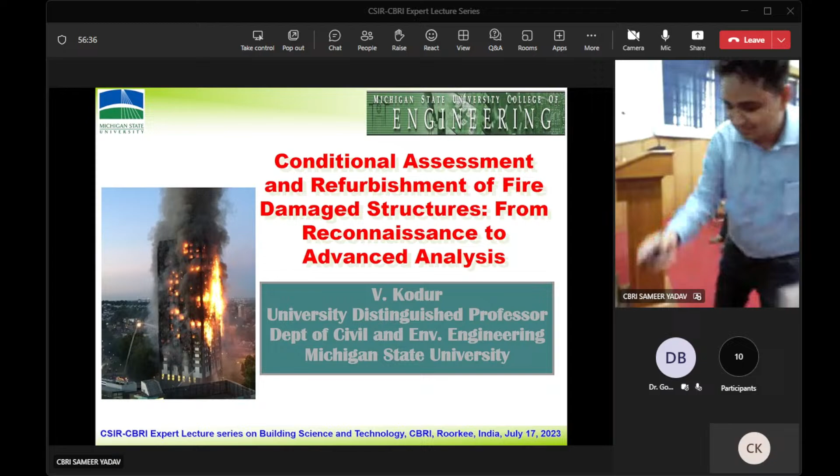Good afternoon to you all. So it's a great pleasure and honor for me to be back at CSIR-CBRI, after about 5-6 years. It's like coming back to the place where I had a few projects before. As you all know, I have delivered some seminars and presentations here. But I meet your directors, group leaders, colleagues, scientists in various forums. They were inviting me for the last almost 1.5 years, since after COVID subsided. So it is good that I have this opportunity.

I would like to thank the director here, as well as Pradeep Kumar, Dr. Arpal Singh, Dr. Benty, as well as many of the fellow group leaders and scientists for making this possible. I received a warm welcome wherever I go around the world, but never have I received a poetic welcome. So thank you very much for that, making it unique. Okay, can you all hear me?

Yes. Okay, so today's presentation is on conditional assessment and refurbishment of fire damaged structures, from reconnaissance to advanced analysis. I'm presenting this because, just like fire resistance design is prescriptive and primitive, post-fire damage assessment is much more primitive.

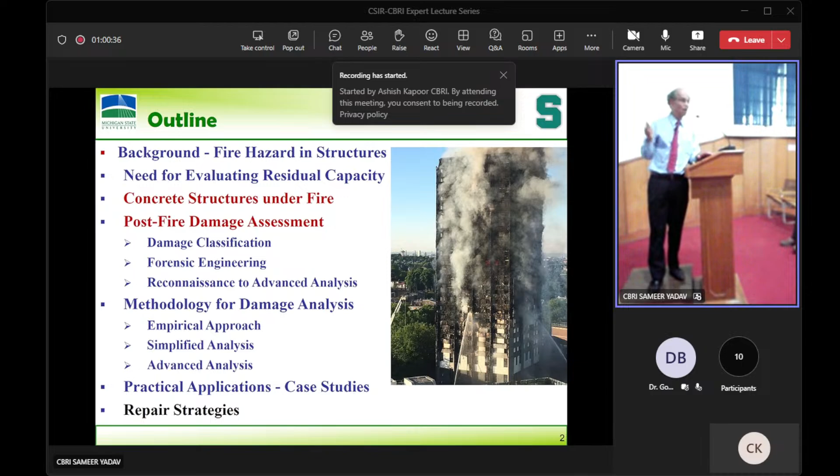And because of time, I don't have time to go into case studies, but recently we did one in Brazil. I'll just mention it, and there is a paper you can look at.

Fire represents a severe hazard and threat to the built environment. It causes thousands of deaths and billions of dollars of damage each and every year in all countries around the world. You see the statistics for the United States for 2021 published by NFPA, for example, 1.35 million fires, leading to about 3,800 deaths and $16 billion of damage.

This is the direct damage. Indirect damage, if you consider some repairs, retrofitting after that, it comes to $50 billion. So many of these fires result in a number of injuries as well as property damage.

Now, when it happens, it is the most severe condition a structure can face. Earthquakes are severe, losses are severe, impacts are severe. Fire can represent much more severe and lead to collapse in rare cases.

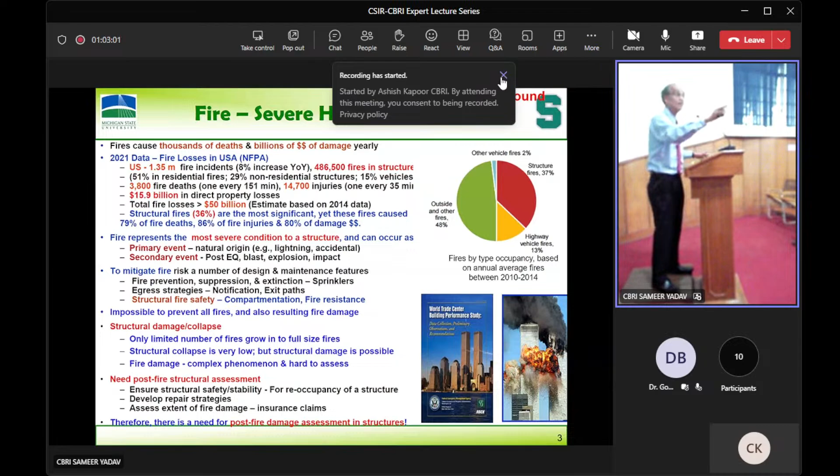Earthquake - New Zealand earthquake, Kobe earthquake, US also, San Francisco earthquake - fire does much more damage in some cases than the earthquake primary. 9/11, when it happened and the buildings came down, we did a 1 year investigation. Our conclusion is the towers would have been standing today if there were no major fire. The impact is not the one which brought down the towers. It is the fires which brought down not only the towers, but surrounding building sites.

So remember now Roorkee is flooded everywhere, including in the campus. In New Jersey, there was a hurricane followed by huge rains. In 2012, it's called Hurricane Sandy, one of the worst hurricanes we had. Huge flooding happened outside New Jersey next to the Atlantic Ocean, basements flooded, and the pumps couldn't handle it. Then what happened? There was one electric short circuit, in 1 hour it spread to 2,000 houses, burned away in 1.5 hours. 2,000 houses, each worth $2 million. These are beachfront homes - so imagine the damage.

So even after flooding, people laugh when I say this, right? Fire and short circuit - anything can happen, and it can spread widely and quickly.

Now, we have a number of measures we put in because we cannot prevent fires. So building codes do address this. They put in active systems such as sprinklers, leak detectors, smoke detectors, exit paths, followed by structural fire safety. You have to protect your structure. If you compartmentalize well, if the fire stays local, it's easy to fight the fire - it's a piece of cake.

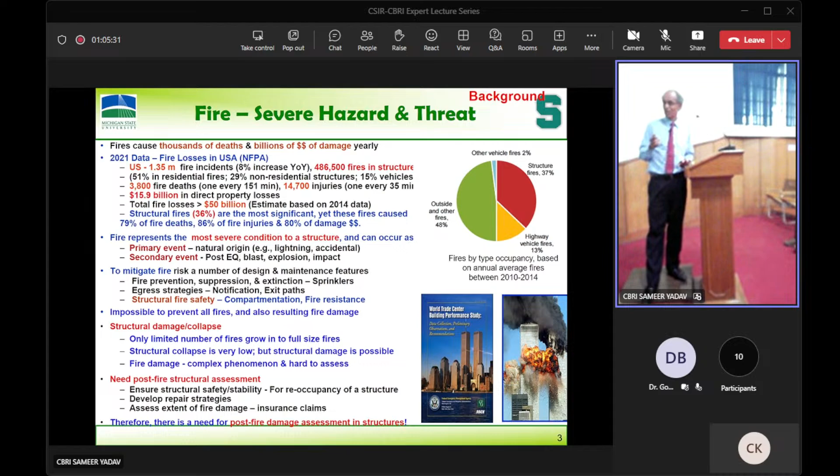Now, it's not just the US alone - look at the statistics here. India has the worst record right now from the fire safety point of view, which is very unfortunate. This is the statistics published by the Geneva Institute of Statistics, and according to that, between 2015 to 2019 - there were 23,000 plus deaths in India every year on average. China is next with 10,000, and then other countries.

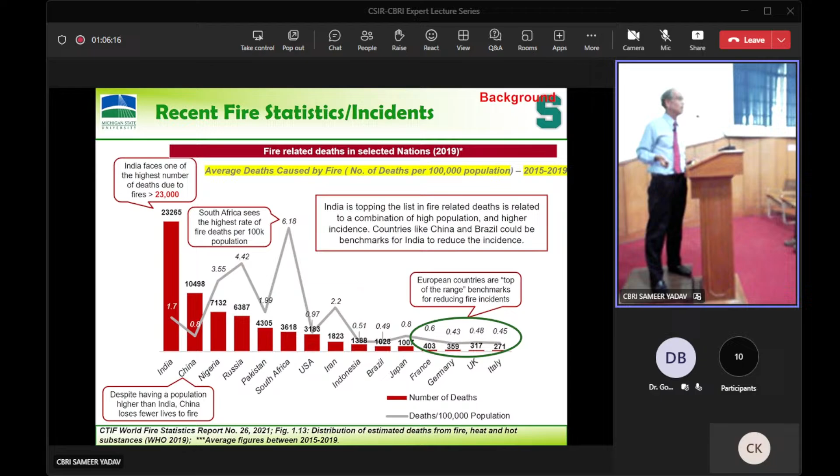People say fires are rare. Not true, a number of fires do happen, and these are some of the major fires in New York City. Fires affect weaker sections of society much more than rich, well-built people, especially women, pregnant women, aged people, and children. So from a national policy point of view, this is very important for organizations like CBRI, to protect the weaker sections of society.

4 days before that, the same thing happened in Philadelphia. The fires grew up there. And you know what happened on 9/11.

I was part of the investigation for a Technical University of Architecture building in Delft, Netherlands, in 2008, when this 13-story building caught fire. A coffee kettle, somebody didn't turn off, a student graduated and went home. There was a sink, the pot heats up, it quickly spreads, an explosion happens, and because of the short circuit, the water main is broken.

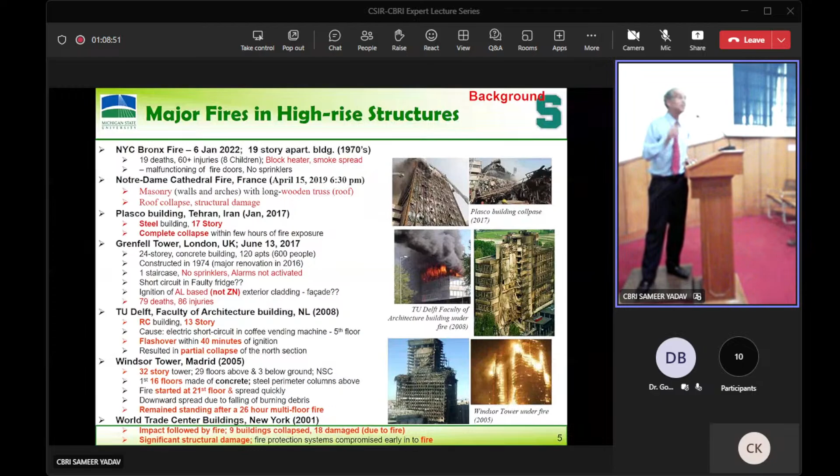But if you look at this building, it will tell you the importance of much more focus on residual capacity assessment and forensic engineering. This building, you might have all read about, it's in London, a 24-story concrete building called Grenfell Tower. Very nicely built building, modern part of the building, apartment building.

Again here, there were a lot of poor people, meaning a lot of refugees coming from Syria. So they didn't know the English language when they came in, though it was in London. What happened is one day a faulty electric wire in a fridge, a small fridge, catches fire, and suddenly fires spread rapidly. This is very rare, fires do spread but slowly, but because of the facades, what they put in the cladding, exterior cladding.

These days we are putting too much of this in our buildings for energy savings, for sustainability, environment. A lot of them are highly combustible. They are not tested. There is no regulation for putting outside cladding and stuff in many of the codes and standards. Fire spreads, and they couldn't get out.

So they were asked to stay in place, unfortunately. They were told not to come down because the fire department would fight the fire. The fire department thought they could fight the fire, but when they couldn't, people jumped to safety. By the end, 79 people died and hundreds were injured.

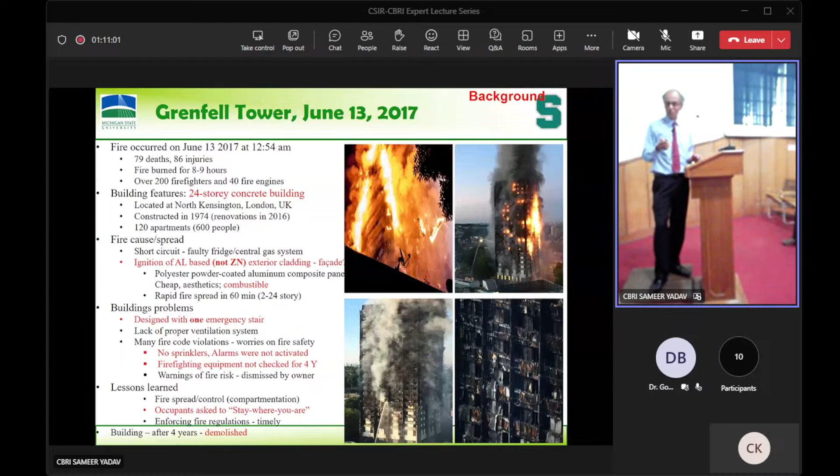Now it's not just buildings. Bridges are becoming a problem these days. Just 2 weeks ago, I sent an article to Dr.

It can circulate to you. This is very important for India, as I see it, for your metro stations or subway systems, which is coming all around the country as well as in the north tunnels.

So this is a steel girder bridge, and this is the I-95 bridge in the United States, the I-95 highway going from Florida to almost New Jersey and beyond, like Boston, basically Massachusetts.

So this big high tanker was going, and it tries to enter the highway exit, and it spills and hits the bridge. A huge fire starts, and the fire department comes in because it's outside of Philadelphia. They couldn't fight the fire, so the spans of the bridge collapse. Much damage. Not only that, the highway was closed for the next 3 weeks until temporary measures on both sides, bringing the supply chain, everything, travel, everything to a standstill.

So a number of bridges, even in Europe, and you see in China recently there were bridges. So rapid assessment is very much needed in these cases, either to evaluate safety, or what retrofit strategies to be adopted, and right now we don't have this.

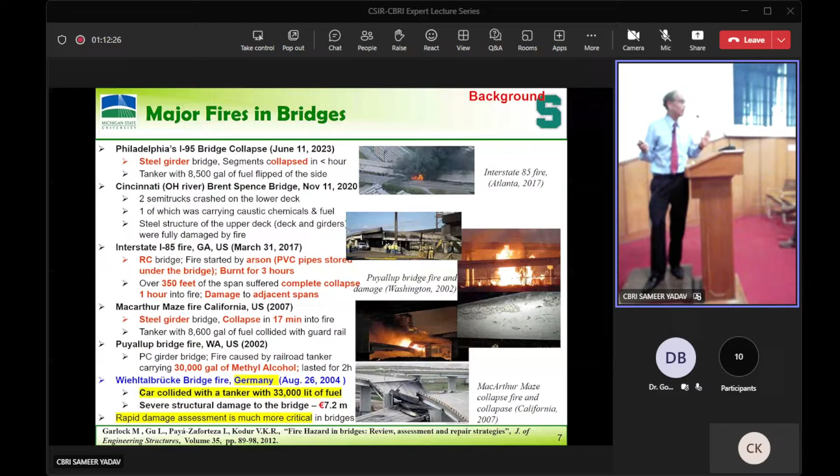So this is another interesting story. This is the I-85 bridge, Interstate 85, a major bridge outside of Atlanta, Georgia. On March 30th, 2017, the bridge was in a very good condition. We inspect bridges every 5 years and give recommendations on rating, just an ABCD rating. We rate them, A is good, D is bad. So this was in a very good rating just 2 years before that.

And after that, what happened? There was some drainage issue, water logging inside. So they brought in a lot of PVC pipes and assembled them for repair. They brought them in the first week of March. That's what happens in the US — all the repairs and highway work start after May when spring season begins, because it's too cold to work outside.

So in March, it was a very cold evening in Georgia, Atlanta. Some homeless person comes with beer bottles, wants to warm himself up. He puts some rubber, takes paper and everything, and starts a bonfire to warm himself. It was cold underneath the bridge where the pipes were. He was drinking, and suddenly he might have lost consciousness. Quickly it spreads to the PVC pipes — you know how dangerous that is, huge pipes. He runs away.

So somebody who sees the smoke while driving calls the fire department. They come in and start to fight the fire. Can you see the smoke in there? It's real, right? Within 1 hour, spans of the bridge collapse.

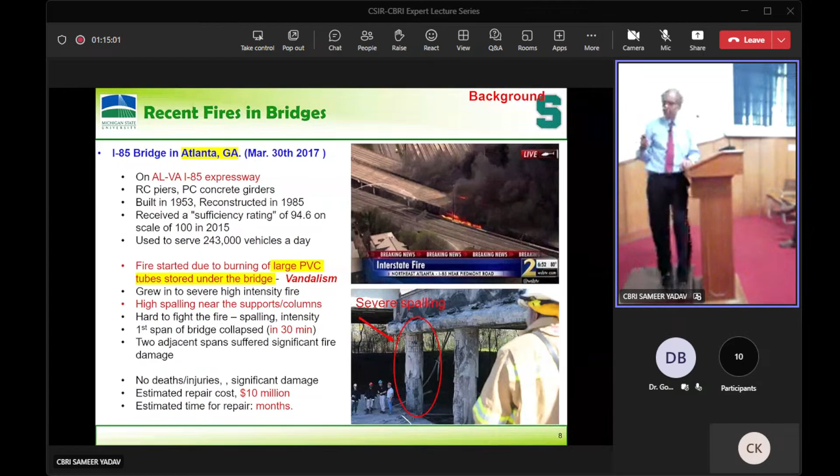And when it comes to India, you know more than that. I follow Indian newspapers whenever I get a chance, or news channels. Hospital fires are becoming much more common in India, which is very, very unfortunate. It's hard to evacuate people, and not only evacuation, but after that, what do you do with the patients? Where do you place those patients?

From that perspective, I was in Dhanbad recently, and I heard there was a fire in a hospital, attached to the hospital building. Both specialist husband and wife doctors died. Their relatives — two of them — died, and their servant died too. A short circuit started the fire. This was this year itself.

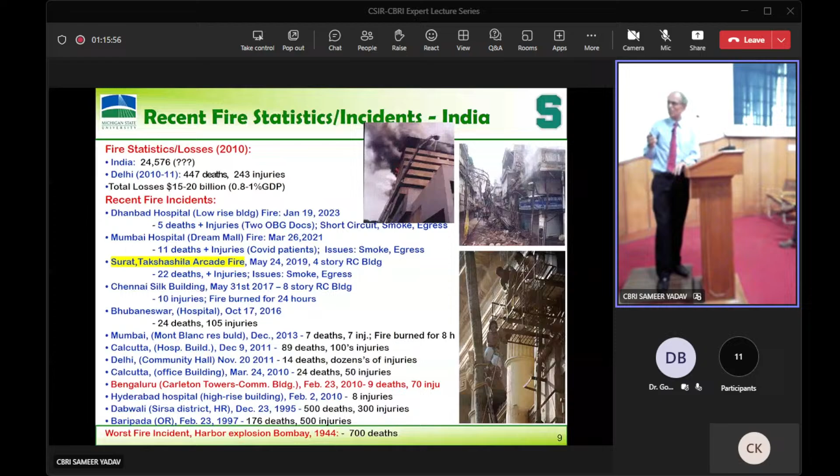So there is a significant number of fires in India. When it comes to an example of how important fires are in India, you can look no further than the Surat Takshashila Arcade building, a coaching center for people taking JEE and other exams. This building is just a 4-story building — and look at what happened.

Electric short circuit, number of students were there in the coaching center. The fires these days, because of the type of materials we have, combustibles we have, because of layers of curtains you use in the home, because so many shoes we keep, our fuel load used to be very less, right?

All this leads to sudden burst of fires. Very quickly they spread. We did tests with Underwriters Laboratories for US fire departments to see how far modern buildings, structural members collapse in 6 minutes, whereas previously the same structure, same contents used to take 30 minutes to experience the collapse. So that's what modern materials, concrete, steel, wood, FRP - the more modern the material, the poorer the fire resistance.

So anyways, in this building, many of them were teenagers, as you can imagine, 24 deaths, right? And they couldn't use the staircase at this stage. The emergency gate - the staircase itself was adding fuel to the fire. This is the scenario with fire safety, right?

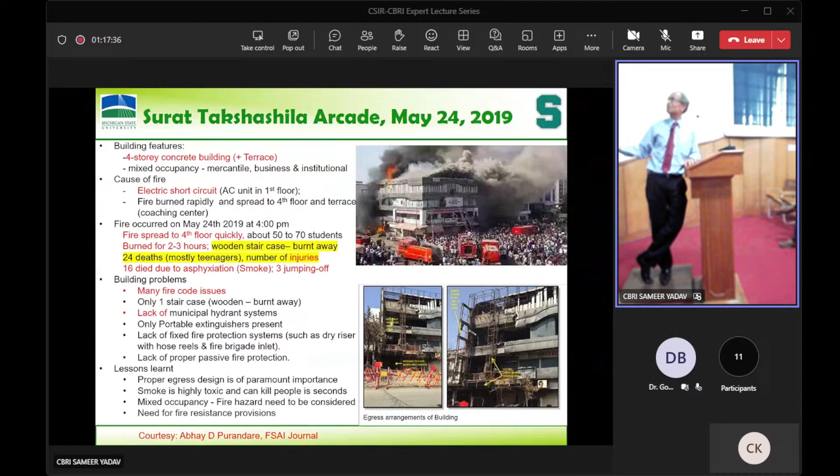So after that, the structure itself was okay, but still it has to be evaluated, so residual capacity is very important. So what do we do currently?

We put in lot of measures in building codes. Not that we don't do anything - active systems such as sprinklers, heat detectors, smoke detectors, exit bars. Some of them work, some of them don't. But the second thing we put in is fire resistance, which is basically a structural member has to stop the fire there itself, which is compartmentation.

The walls and floor systems are flat. Our columns and beams, they should have stability through for 2 hours, 1 hour, 3 hours duration, depending on the height of the building, size of the compartment. So we put in this.

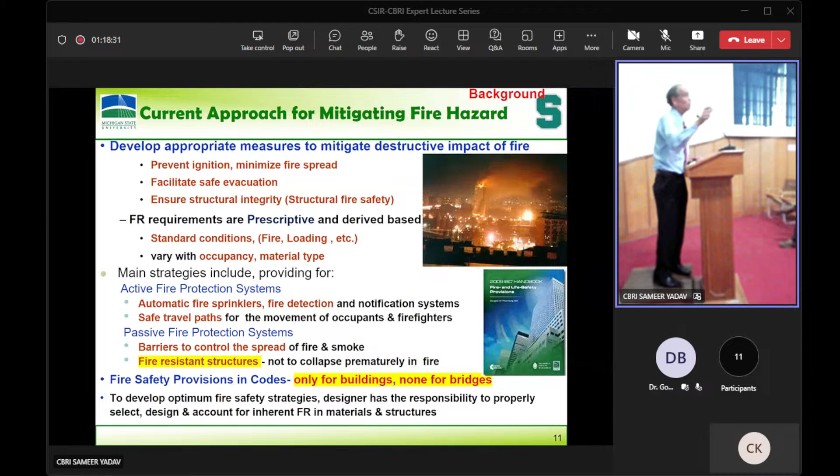But we don't have anything for bridges, very little for tunnels, tunnel linings, for example, and also there is no specific studies when it comes to metros and some of this as well. That's where currently it stands.

Now, if you see that, all these measures we put in, this is where your sprinklers see. This is how fire grows in a room, typical. Look here, slowly, it takes some time. It doesn't grow very fast.

But after that, once everything starts burning, this is called the ignition phase. This is called the growth phase. It grows, flashover happens - then whole room burning is flashover. Then you have fully developed fire, and then it dies down.

So where does structural fire safety come in? Here - nothing happens to the structure up to reaching the fully grown fire. Nothing happens to your structural elements. It's only sprinklers, heat detectors, smoke detectors - they are the ones which play a role.

Even when they don't play - if they put out the fire, that's good, right? So then, if they don't put it out, then you have growing into the phase of the structural. So at that time, structure has to withstand that fire.

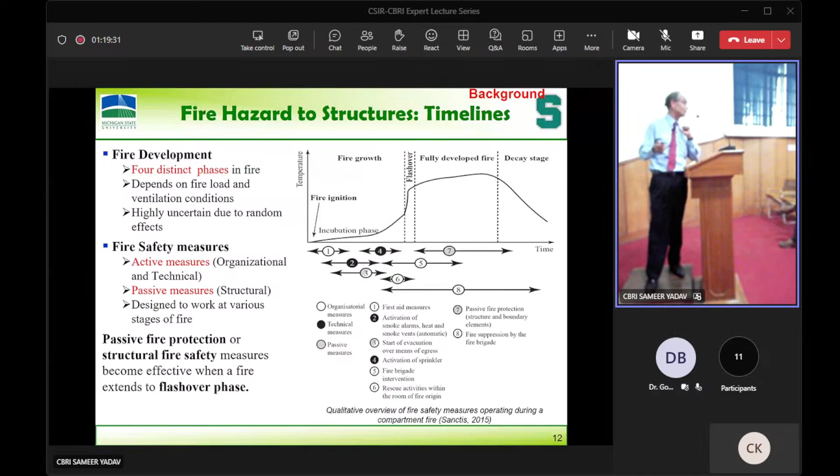Now, so in this case, what we can conclude is fire is a rare event. It doesn't happen in thousands of fires - it's still there. When it occurs, only a subset of fires grow into it. Otherwise, they are put out by the firefighters or sprinklers or automatically. A lot of fires die down themselves if there is not enough oxygen or fuel.

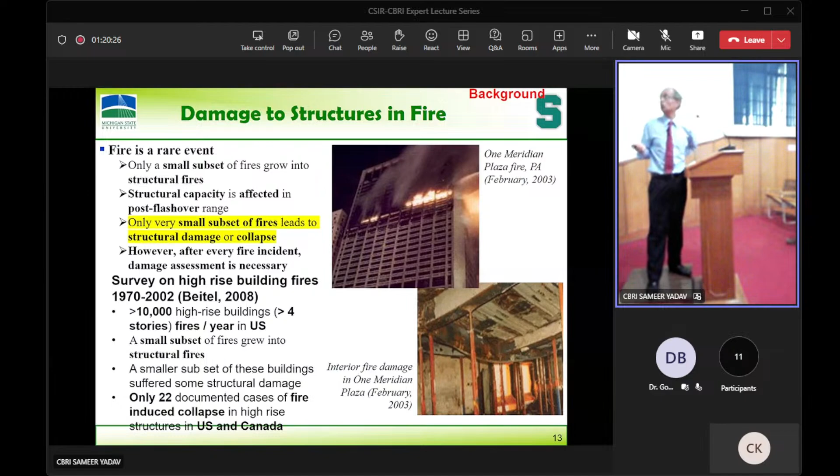But when they go into a small subset of fires, they will do damage to the structure, and a much smaller subset will lead into collapse of the building. But when they do the damage, whether to get back to that building, whether to open the bridge, how much strengthening has to happen, how much to put back the capacity to the original level - you need assessment first before even the record, how much insurance damage you need. Okay, so that's very important.

Now, fire damage is not as easy as we say by looking at it. With experience, you can do a little bit of that, but otherwise you need proper engineering because it depends on number of factors, such as how severe was the fire, how long it burned. Common sense - concrete can withstand better than steel or wood, right? So then structural detailing, how much load was there during the fire or before the fire, or how much reserve strength.

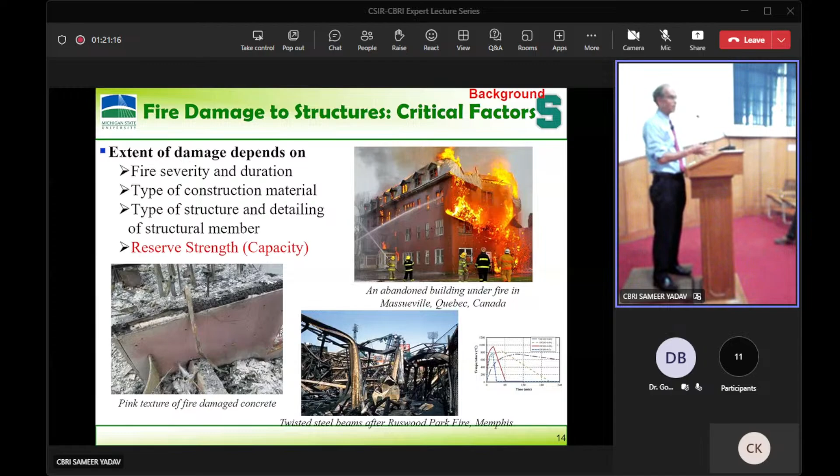A lot of times we over-design the structure, very commonly in most cases. You need to know the higher the over-design - these days it's reducing, that's why the structures behave well. More the reserve capacity, better it is from the fire safety point of view.

All this is important. Today I'm going to talk about, we have done the same thing for steel structures, but a lot more focus on bridges because steel bridges are much more vulnerable. We don't put fireproofing. I'm going to present most of the stuff today is for concrete structures.

From this point of view, concrete, you can expect very good performance during the fire and after the fire. So when the fire dies down, concrete structures do have a good level of reserve capacity to retrofit and strengthen.

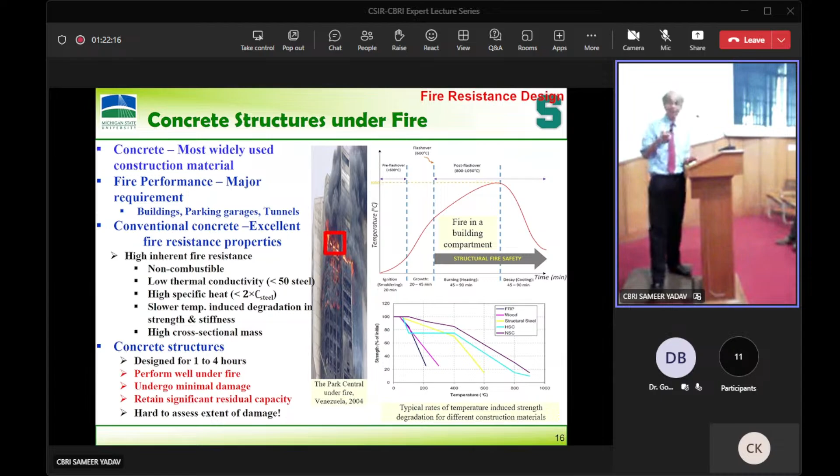So nobody wanted to fight the fire. There were bodies stuck underneath, so they were pulling out the bodies. When we were there, unbelievable body parts. They were focusing much more on that than on the fire, and also on opening the area for the stock market. But anyways, this building was on and off, nobody was inside, but even after 5 days, it didn't collapse.

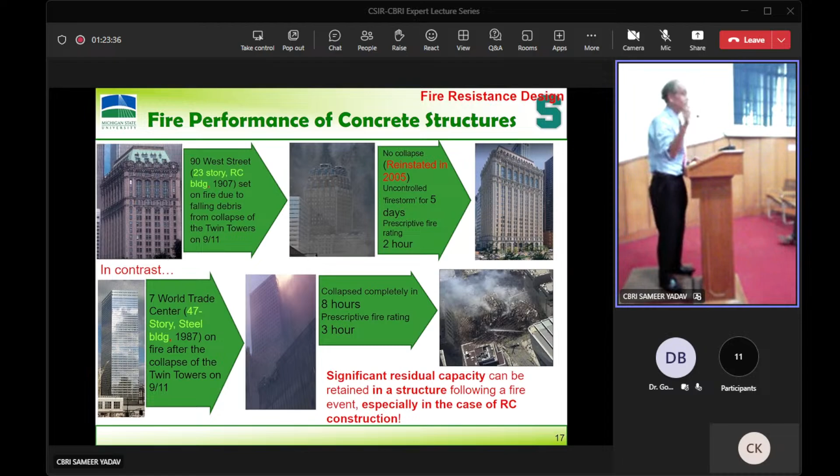Look at the steel frame building. This is the 7 World Trade Center, opposite to the two towers, a nice steel frame building. A fire spread into this building on and off, it burned for 8 hours and collapsed in 8 hours. Steel frame building. So this gives us a good idea that concrete buildings do have much higher fire resistance capacity.

Now quickly, this was a fire in Turkey just recently, in April I believe. In this building, 8 floors high, a rich condominium building, and you can see here, concrete buildings... I wanted to show you how it works, anyways it doesn't work. In this building, when the fire spread rapidly and quickly, for 8 hours firefighting was happening, many people were evacuated, nobody died luckily because quick evacuation happened.

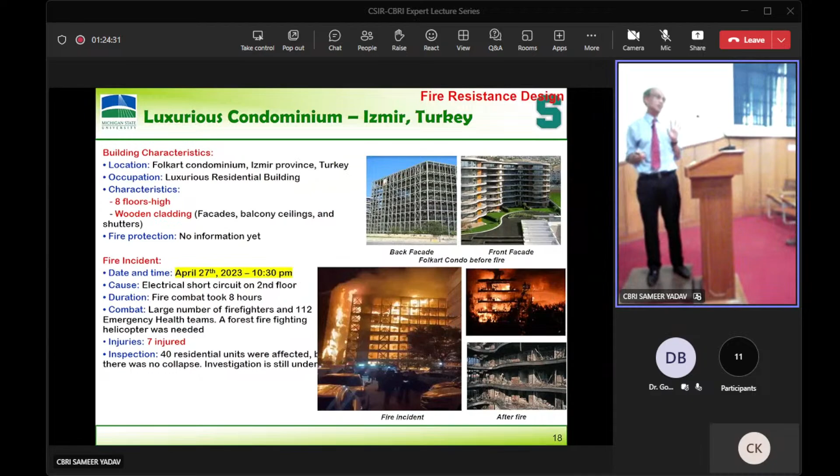But one important thing is it didn't collapse. Now they are retrofitting this building and bringing it back to occupancy. So this shows the importance of concrete structures having this resilience.

So I already mentioned quickly, why do we need to evaluate residual capacity? To assess the post-fire damage, whether it's safe to send people inside, to send equipment, to send first responders inside, even to look for bodies. So you need to ensure short-term and long-term stability is there.

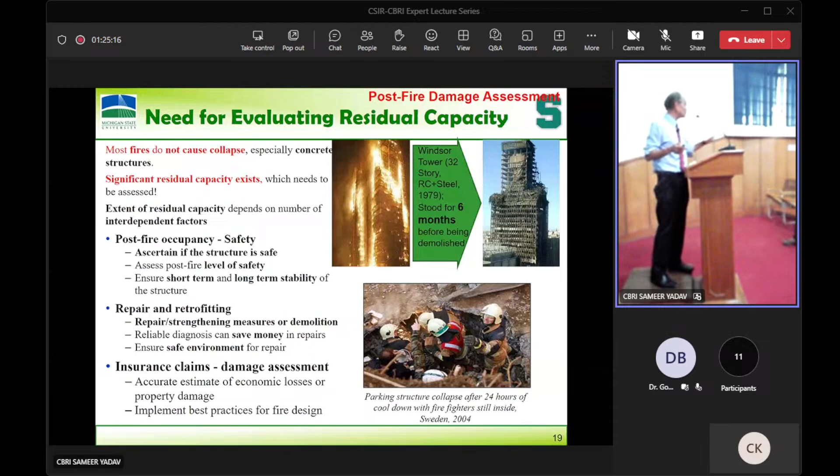Second thing is, if you want to repair, what level of repair is needed? You cannot just cover up cosmetic damage. You need to know how much rebar still has strength, how much concrete spalling has happened, whether to bring it back. And then insurance plans - a lot of times buildings are insured in most countries, so when you want to pay out, insurance has to estimate and approve that damage. So this is very important.

So what happened was they went inside and fought the fire, came back, and everything was fine, they went out. Next day they have to write the first investigation report. The firefighters are responsible, so they went in. After about nearly 24 hours, both structures collapsed. So it's the cooling phase, not a residual phase, I call it.

That's why in Madrid they didn't want to go. The residual phase is much more dangerous from that point of view. A lot of times firefighters aren't knowledgeable because we aren't teaching much of this in our courses. So the residual phase is more dangerous than even the heating phase sometimes. In the heating phase, they're covered, they're visiting, they're far away. In the residual phase, they're very close. The structure is cooling down, it puts too much stress on the connections, and it's recovering, with too much tension forces. It's not designed for that, so it comes down.

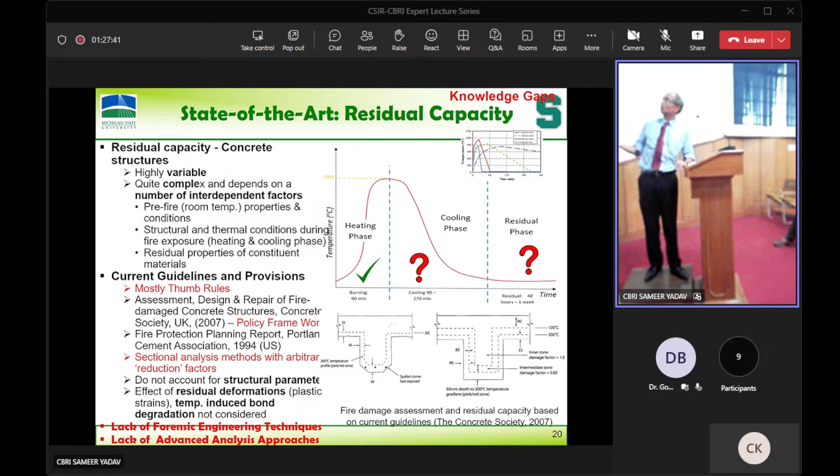So then there's a lack of engineering advanced analysis approaches. This is how it typically behaves. If you have a building here, let's say this is under fire, that's the beam. You want to see how much capacity it has. So this is the fire in the room itself, in that compartment. This is the temperature in the rebar inside the concrete - you know where the rebar is. And if you see here, this is the depth of the concrete beam.

Somewhere there. Now, the deformation - this is the first 15-20 minutes, nothing happens. Then slowly deformations increase. But since it's cooling, with a certain lag, it starts to regain its deflection, regain its strength. Then it goes up - this is the residual. So finally you end up with residual deformations, and that's the one - when you have residual deformations, the capacity is very complex to model.

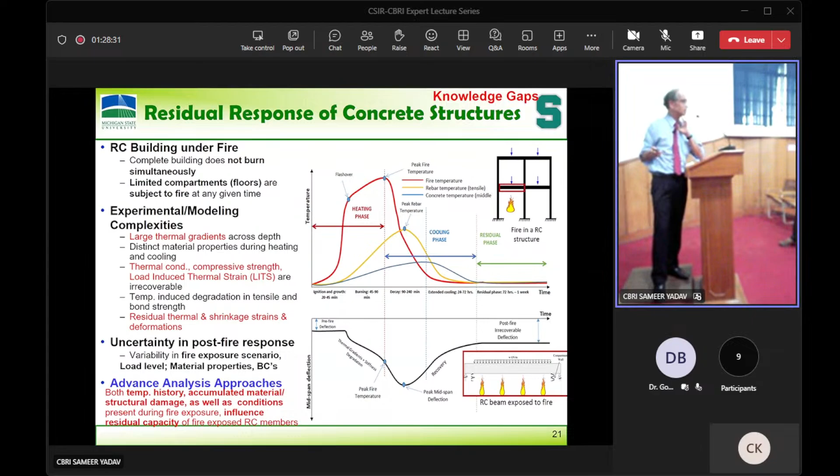It's not easy. So we have done a lot of work over the last decade or so, as I mentioned, on this subject with significant funding. So what did we do? First, we looked at the state of the art, as I already showed you, and identified the knowledge gaps. Then we came up with a classification system for damage assessment. Then we did a lot of experiments, and developed methodology at different levels, depending on different extents of damage, which have different classes of damage. And then we did some practical applications and repair strategies.

So first, let me quickly show you some experimental studies. Doing a residual capacity test is different from a fire resistance test - you cannot do it in one shot. You have to do 3 stages of analysis or experiment. Just before the fire started, you need to know how much capacity the structure has. This building was built in 1947. Today, we don't really know the capacity of the beam. Even at that time, if you look back at drawings, you cannot take it at face value - the real reserve capacity has to be established based on this.

Then you have to subject that beam to fire, involving heating - a realistic fire, not the standard fire - heating phase, cooling phase, whatever is present in the room. Then once you do that, after the cooling down, you subject that beam to a structural test to find out how much capacity remains. So 3 stages of analysis are required in doing this experimental procedure, which we developed in 2013 and 2014. So if you see here, this is the first stage.

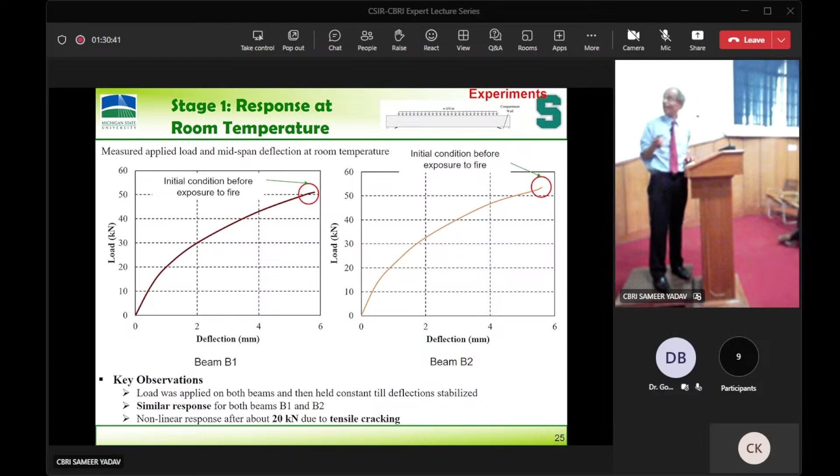First stage is this: you need to apply the load to those beams equivalent to whatever the service loads were, not the full design loads, not the ultimate capacity. You need to subject them to service load, find out how much deformation and deflection the beam has under service load. Then you carry out the fire resistance test on the beam by subjecting it to fire. Look at this - this is the fire load, just like it was in that room, depending on the fuel load. You can calculate the fire loads - I'll show you quickly. Then this is the temperature in the rebar, and this is the temperature in the concrete, measured at various places using thermocouple instrumentation. Then this is the deflection - look at this, this is one subjected beam. We tested these 2 beams.

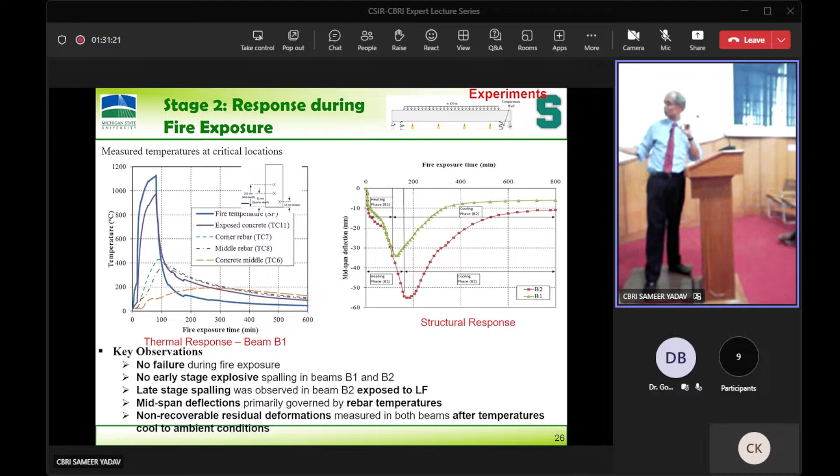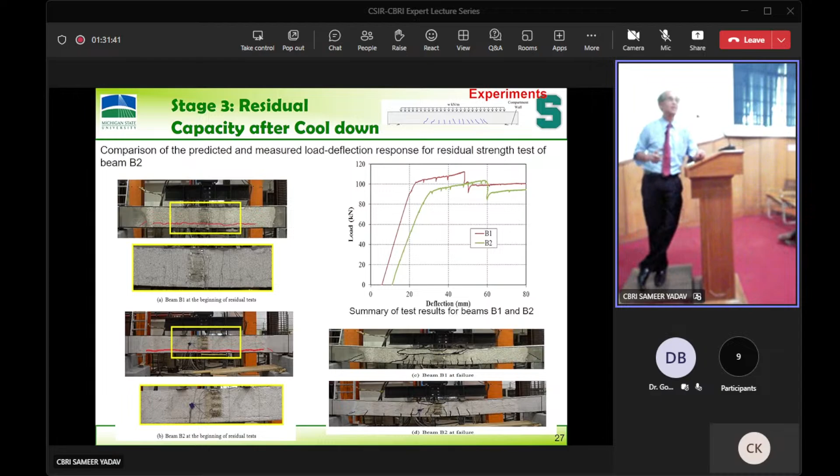One with a short arc fire and one with a long arc fire. So there were 2 fires which we looked at. As you see, this is short arc fire, this is long arc fire. We subjected that, then established the residual capacity. The one with long arc fire has lower capacity than the short arc fire, the low deflection one. Then you can estimate what the capacity is.

Following that, tests were useful for model validation and a number of things. Then we started the fire damage assessment procedure we developed. For inspection, everyone used to ask me before, give us some charts, what is what, how to inspect this. We said as soon as you go with some experience and background, with an engineering degree and expertise, you can assess on the second or third day at the job site. You can divide it into 5 classes of damage.

Class A, Class B, Class C, Class D, Class E. What is Class A? It's cosmetic damage - paint came out, chips of concrete, not too much to worry about from a structural point of view. Smoke damage, you know what I mean. Class B is minimal damage, you check some of it. In steel structures, you see the fireproofing coming down sometimes. In wood structures, small bit of charring. Depending on the material, you have different damage.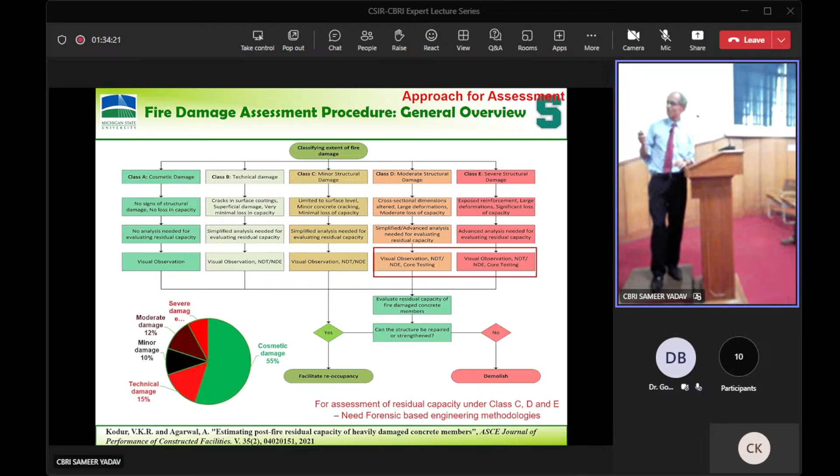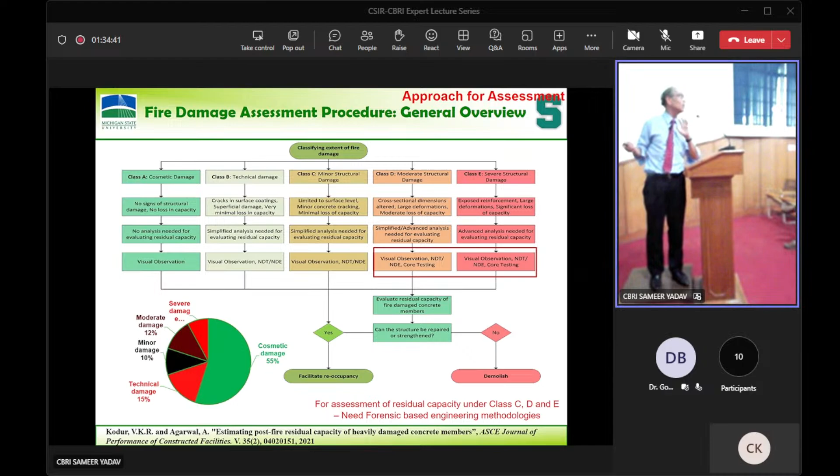This is why engineering assessment is required. We looked at a number of cases, as you know, of how many fall under minor damage based on previous fire incidents. Very few will fall under Class E when fires happen. Much of them fall under B, C, and D - moderate to severe damage, but not full collapse, maybe local collapse.

These thumb rules can be used. Based on the coloring of the concrete, you can tell something has changed. Whether the insulation has come out on the steel can indicate whether it's Class B or Class C. So you use thumb rule visual observations, as well as cracking, which can tell you what the fire exposure was. If there is significant spalling, it's more likely related to a hydrocarbon fire.

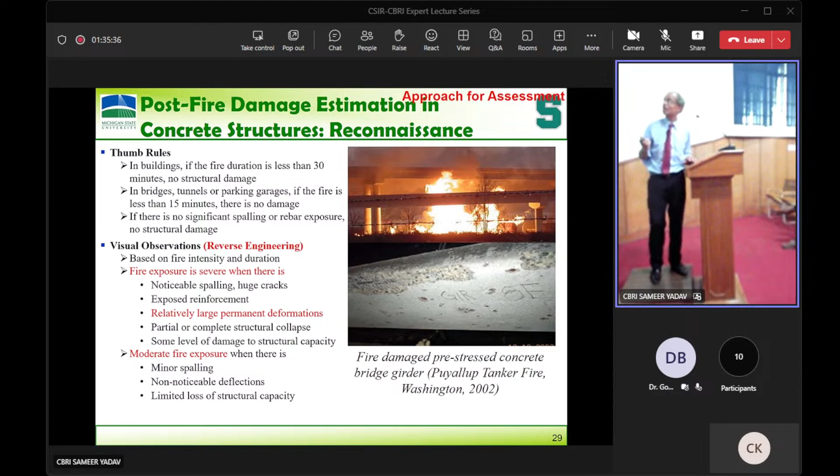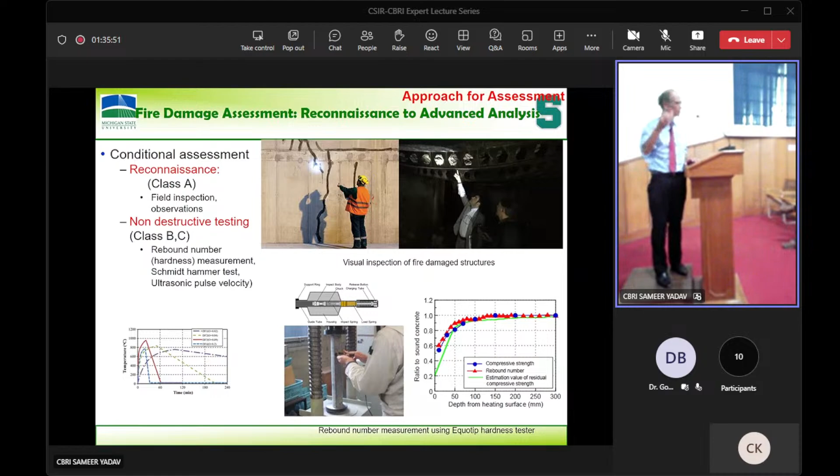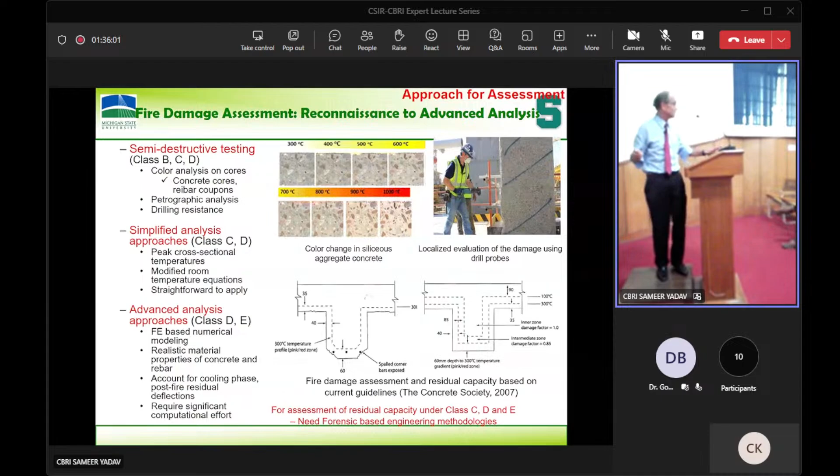A truck hit causing a petroleum fire would be a huge fire, whereas a small house fire is much smaller. So based on experience, I can tell what temperatures occurred after the fire without even going to the site, just from someone's explanation. If it's Class A, you don't have to do anything, just field inspection is okay. For Class B and C, non-destructive testing can be used by taking small coupons from the site - rebound, ultrasonic pulse velocity, and similar methods. For Class C and D, you need to apply simplified or advanced analysis approaches, which I will talk about. The first step in the analysis is to reconstruct what the fire was like in the room.

That's very important—you need to think about what the fire was and what the structure was. Once you know that, it's easy. What's the duration? What I mean by reconstructing the fire is you need the temperatures and the approximate fire duration.

In this case it's not that hard to reconstruct if you know it's a hotel building. This room was burned, but there are many rooms in the hotel which are not burned, so this is a replica of that. You know the fuel load immediately—most hotel rooms have similar beds, similar kitchens. So through reverse engineering, or by talking to the owners and people maintaining the building, you can figure this out.

Once you've reconstructed the building, you can come up with the fire curves. I'll show you that. Then observe the structural members—how much cracking has happened, how much spalling has happened, how much insulation damage—and the color of the smoke can tell you this, even the firefighters can tell you.

Also, during firefighting, these days firefighters use temperature guns—automatically built into their hard hats and helmets—which record the peak temperatures, if they're on time and everything.

That's also valuable. So once you calculate the fire, you can use thermal analysis. Once you know the fire curve and the structure, you can calculate the temperatures in the cross section. Once you calculate the cross section, you link it to how much concrete must have lost strength at that temperature at different layers.

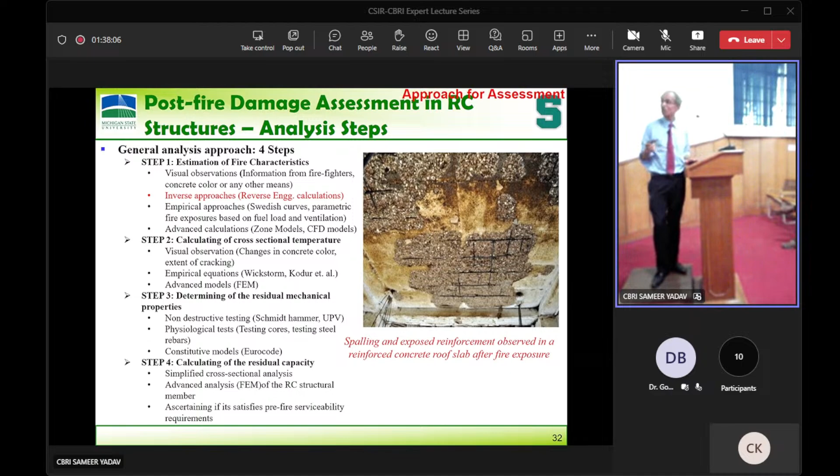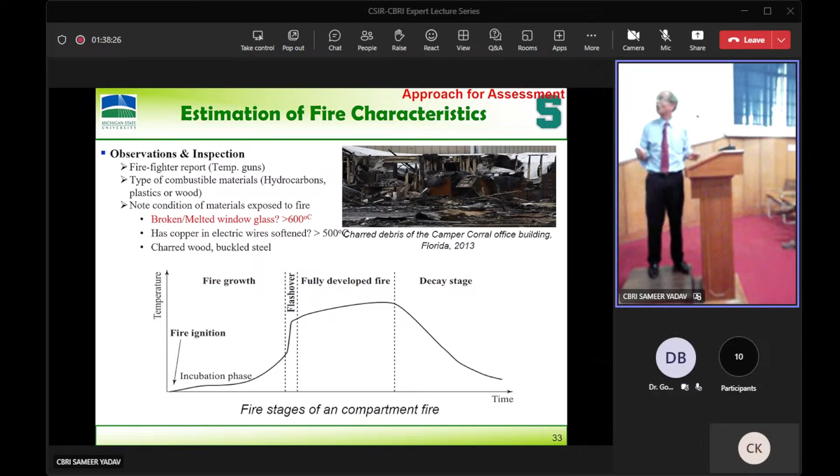You can do CFD modeling and advanced modeling, or you can use simple curves like this. Many of you know the Swedish curves—the most famous curves, developed by Magnusson in 1970. Depending on how much fuel load—meaning carpets and such, which you can weigh and know in kg per square meter—as well as the ventilation factor, you can compare and get that, and put it on this curve to use.

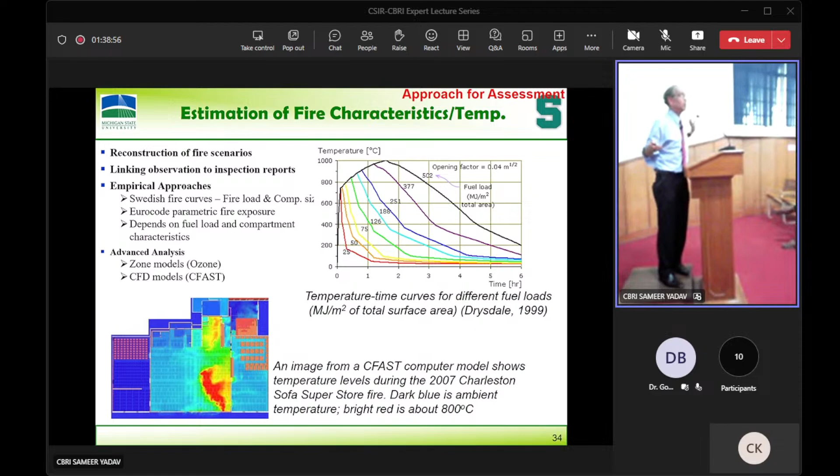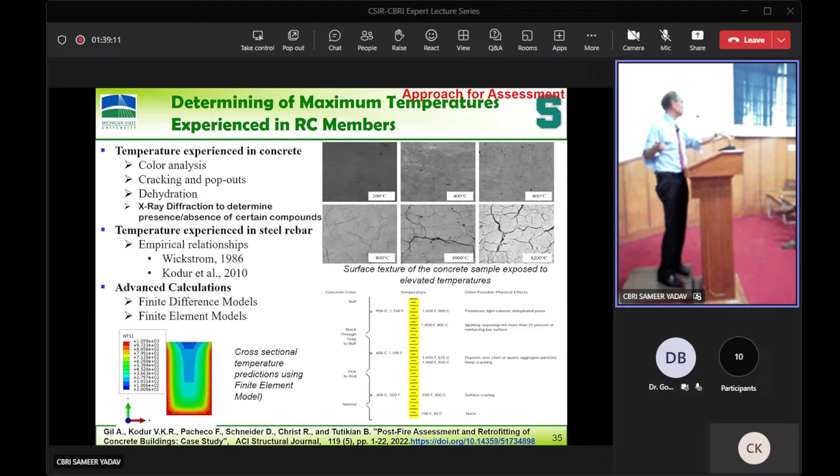This is a very simple predictive approach. Once you do this, you do the thermal analysis to get the temperatures across the cross section—heat transfer. Because you know the fire curve, and you know the size of the element and the concrete's thermal properties, you can do it.

Then, to verify, you can do rigorous petrographic analysis and other things to see whether your temperatures match—if it's a bridge or something—with the temperatures inside the concrete core, and the change in concrete color and petrography. So you can develop whether your temperatures are within range or not. This is cross-checking, you can do that.

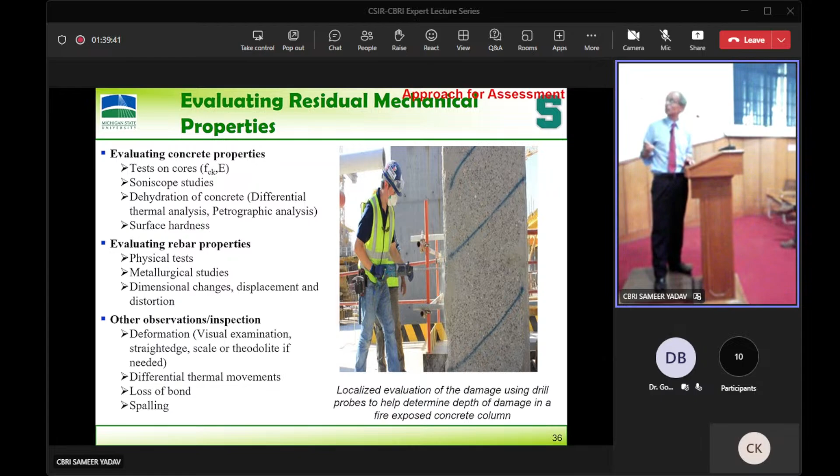You don't have to really do this, but once you know the temperature, you have these curves available—this is strength retention versus temperature. So what is the residual strength at a given temperature, for each layer of the rebar?

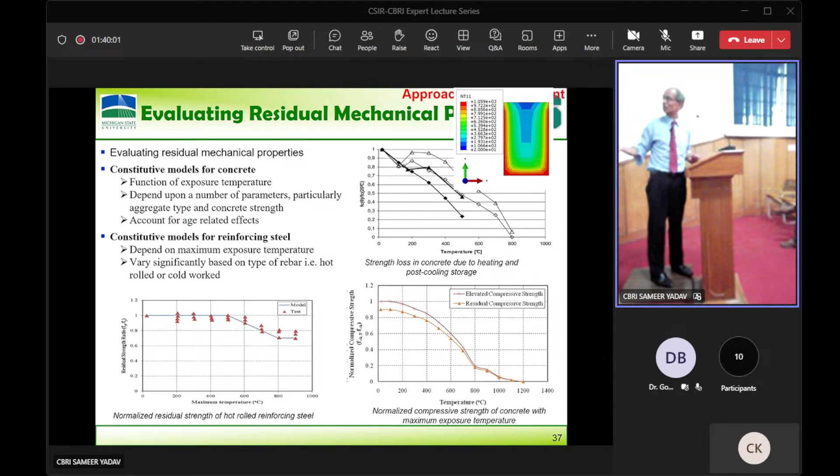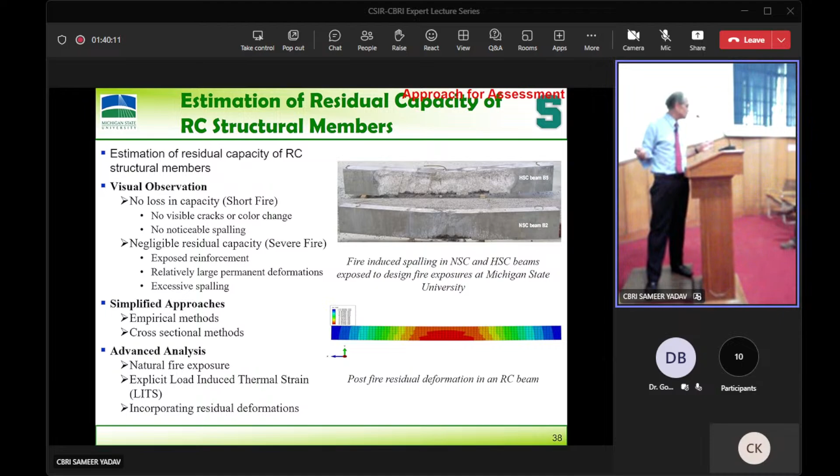This much of concrete is spalled here or here. You can remove that section, right? So your b reduces maybe, and your concrete strength reduces here, steel strength reduces here, AS, FYD.

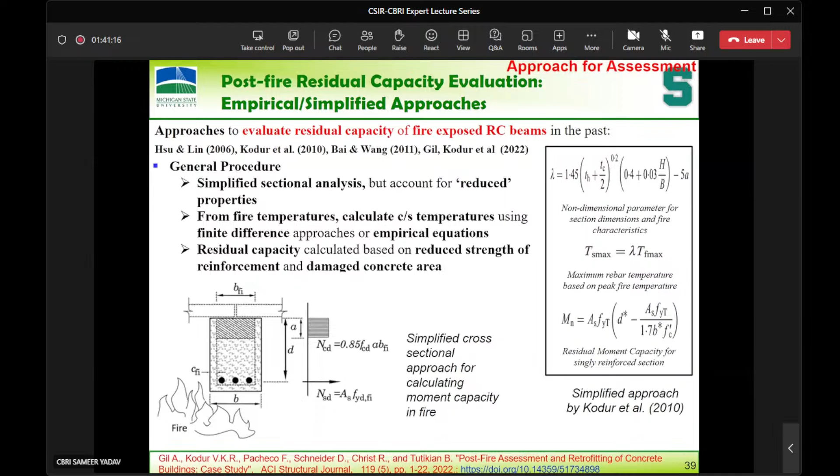Where did you get FYD? In the previous graph, based on the temperature of the rebar level, you got the residual strength. So you establish the equilibrium equations, calculate the moment capacity, axial capacity, whatever you want, check against the loads that are going to come. So just like typical structural engineers do, this procedure can be applied to establish how much capacity is there. Now we use this, to see whether it works.

This is a building in Porto Alegre, Brazil, which is south of Sao Paulo. There was a building there, I have collaborators there. There is a university there, an office building, 6-story. This caught fire, electric short circuit as usual in that country. This building suffered very much damage for whatever reason. Typically they use low-grade concrete and stuff.

So I was involved with them. After the fire department came, they fought the fire, but not very successfully. There was a lot of damage, but they wanted to retrofit. There were some huge buildings, and in this big number of buildings, this compartment here, they were all burnt away, as you can see.

This was their approach. So we reconstructed, applying the approach I showed you so far, to reconstruct the fire. From fire, we went into temperatures in the beam, temperatures to strength, strength to capacity. So then the building was retrofitted. I have all the steps, but because of lack of time I'm not showing you this - if you have time later, I think we can talk about it. But this was recently published, and the building is back to use.

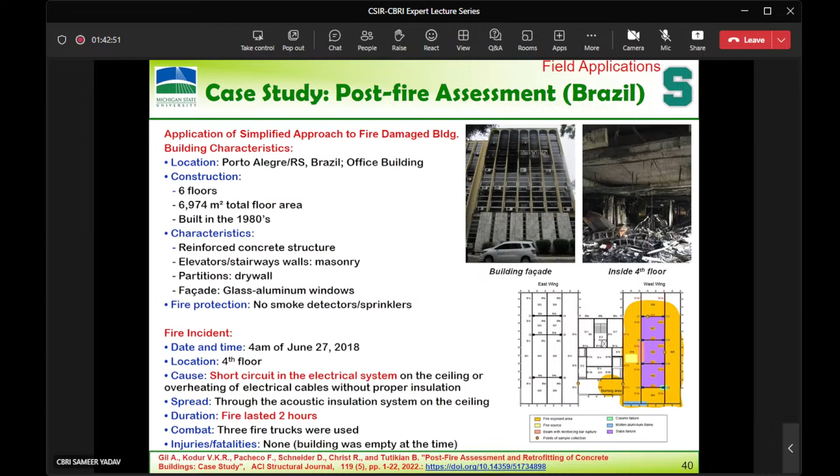But these days we have computers, we can use advanced techniques to get more accurate, reliable results - why not? So you have to use advanced analysis because in the previous one you cannot account for spalling, you cannot account for temperature creep, bond. These are some of the issues with modern materials, right?

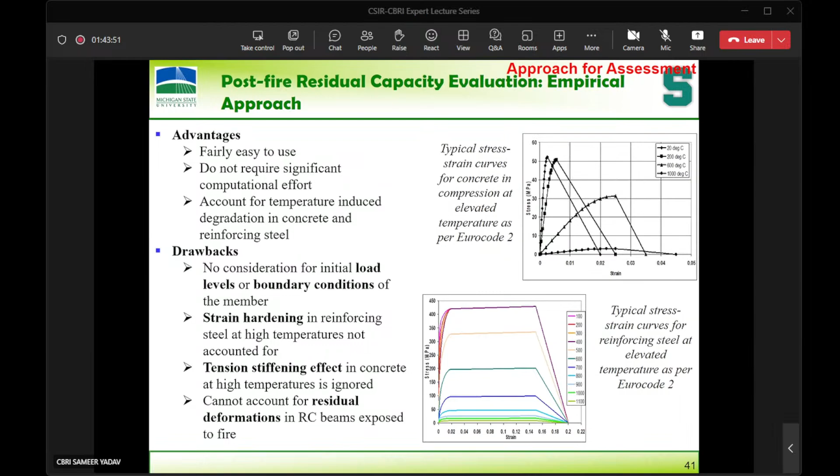So that kind of stuff you cannot use in this simplified approach. So what's the alternative? You can do advanced analysis. As I told you before, in the experimental studies there are 3 stages of analysis. If you want to do the finite element modeling, once it's set up, first you need to know what is the level of structural capacity just before the fire starts.

Then subject the structure to fire just like before. We create the fire curve, what it was in that room or building, and then estimate the temperatures of the concrete and steel members, and then follow up with the analysis approach to find out the capacity. So that's the three-stage approach. Finite element models can be applied, and you can account for creep and all the stuff.

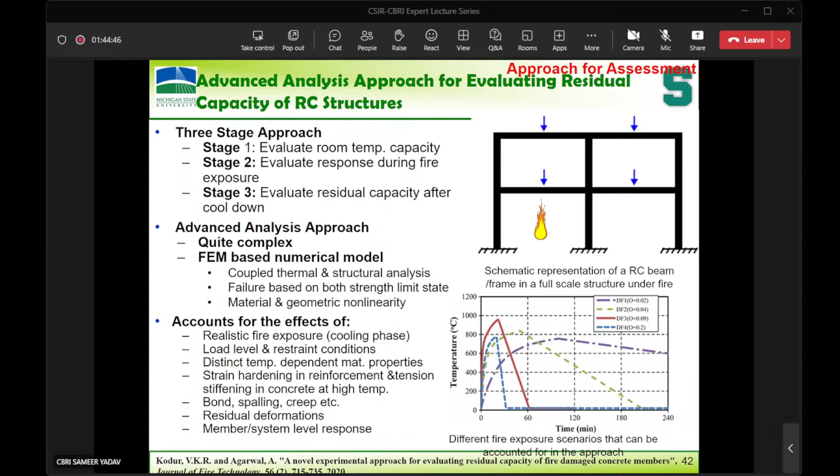So if you are retrofitting a major frame, a major structure, or a building, this can be very useful for doing this. You can create these fire curves. So this is the flow chart to do this.

As I mentioned, stage 1 is just before the fire, stage 2 is during the fire, and stage 3 is the residual phase - 3, 4, 5 days after the fire, how much recovery happens. So when you subject it, stage 1 catches fire, stage 2 it cools down completely, then stage 3, up to 3-4 days, it recovers its full strength.

In this case, in stage 1 basically you establish a response and find out how much initial deformation of the structure was just before the fire starts. And you need to superimpose that during the fire, because those residual deformations will have an effect on the performance of the structure during the fire. For that, basically you carry out the analysis, but you cannot use just building code, IS 456 equations.

You have to use finite element analysis to get the deformations, not just the stress. You need to know the residual deformations and the service load just before the fire, because after 50 years, the strength used in the design stage is useless. You can take a core to check. Also, any reserve capacity in the rebar can be used, tension stiffening and strain hardening can all be imposed into the analysis.

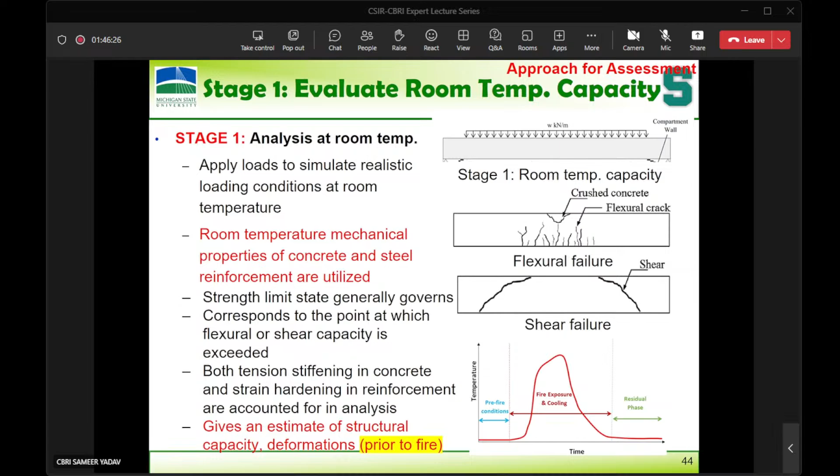Then you do the stage 2 analysis, thermal analysis. You know the thermal properties of the fabric, they change between heating and cooling phase. But for mechanical properties, you need stress strain curves, you need the bond slip relations, spalling, all this can be incorporated, and you can generate that during stage 2.

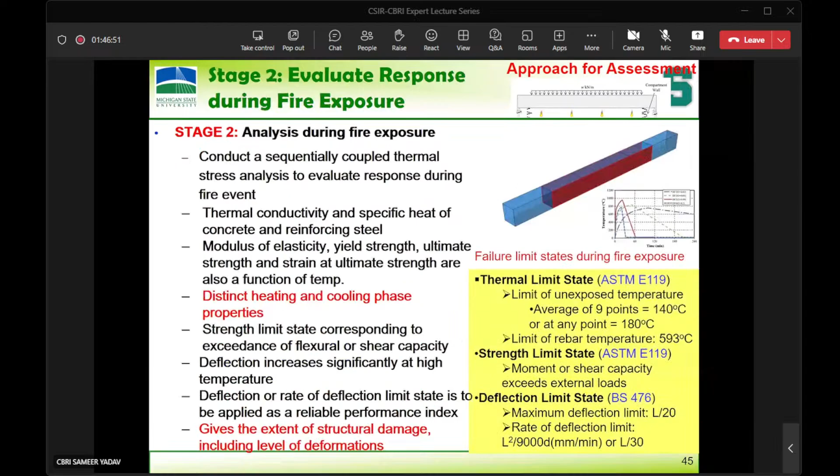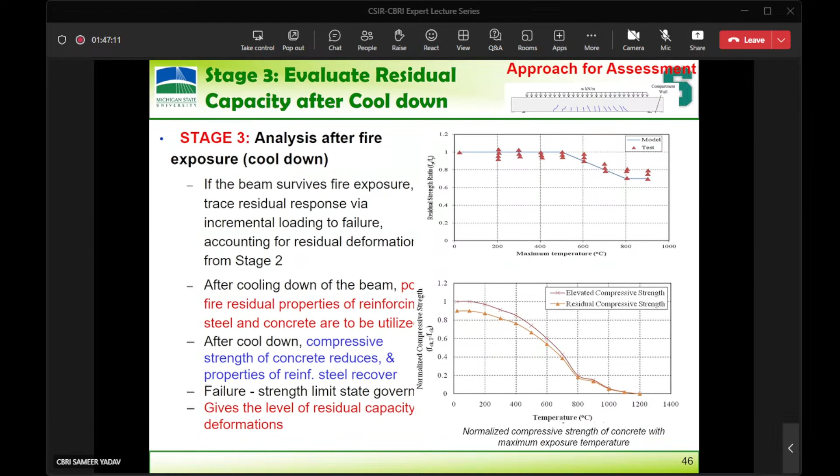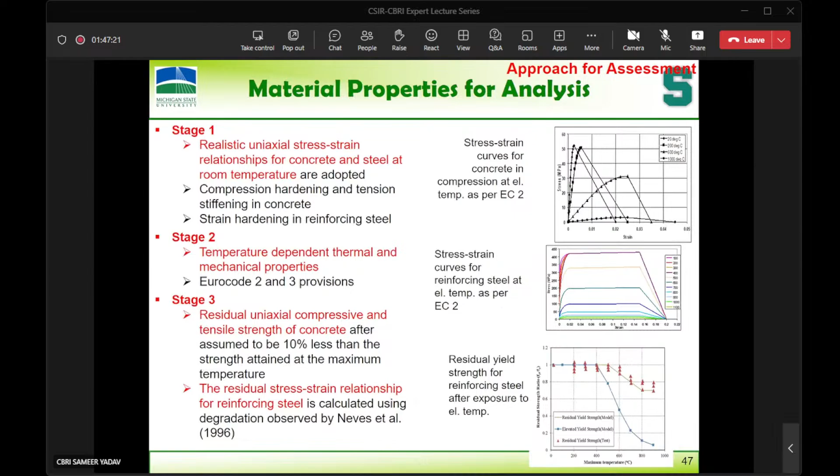Stage 3, after the fire exposure, what properties do you need? These are called residual properties. You heat the specimen, leave it to cool to room temperature for 2 hours, and then test that cylinder, that's the residual. During fire, in the heating phase, when it's still burning, you test it to see how much strength it retains and develop the stress strain relations. So at each stage, it's a different set of relations you need: stress strain curves and thermal properties in stage 2, and residual properties here.

So how do we apply this? I have a case study here. We tested 2 beams, one subjected to short arc fire, which we call B1, and one subjected to long fire, called B2. It's about 4.5 meters between the supports.

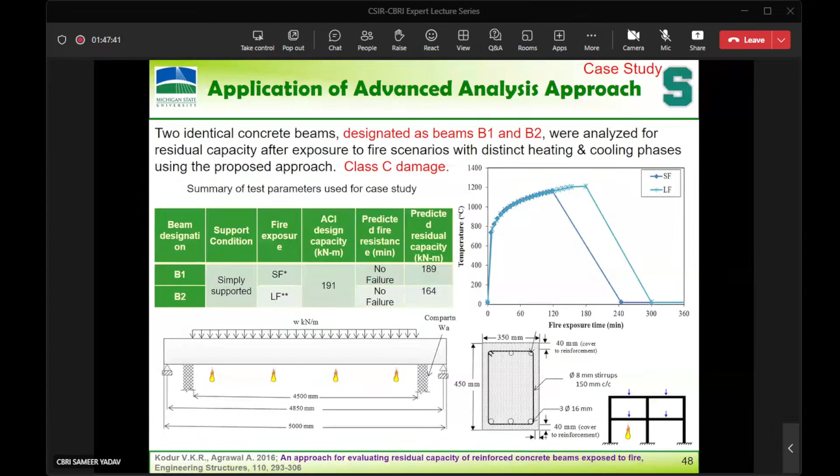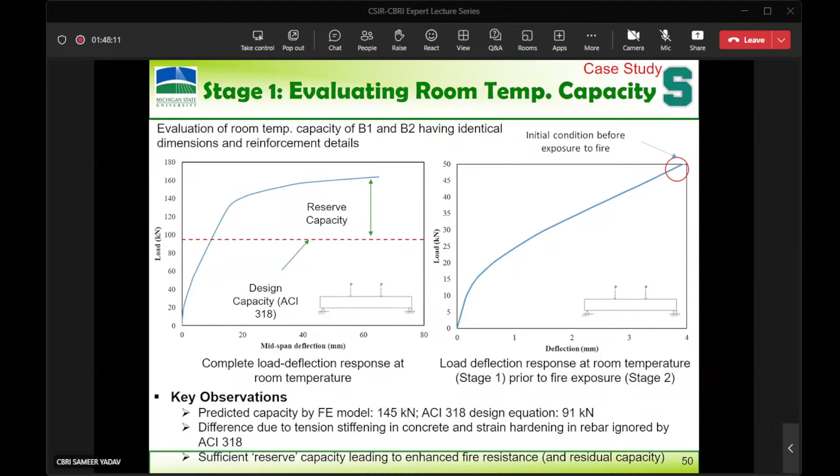This is the concrete beam, so you discretize it in Abaqus or ANSYS, anything you could use. Once you discretize, stage 1 of the analysis gives you the deformations in the beam just before the fire starts. You don't know what happened before the fire when you inspect it, but you can simulate that on the computer based on the load, since you know the load levels in the building day to day, and you can estimate that.

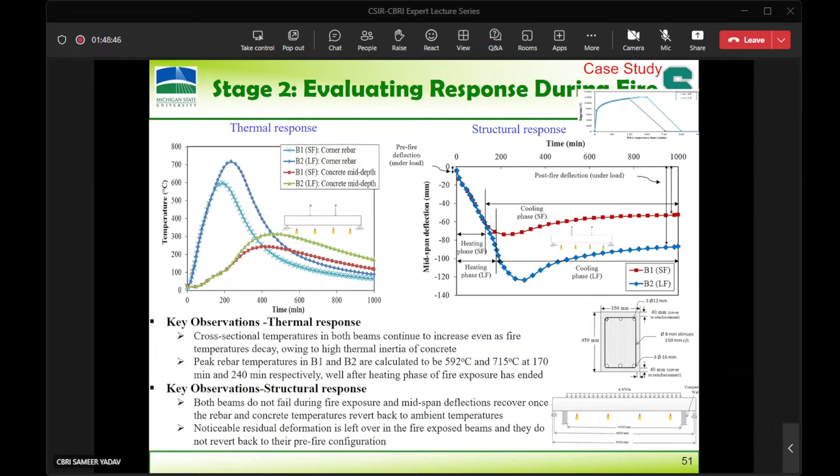So you superimpose those deformations here. These are the temperatures at various points in the beam being measured - at the rebars, quarter depth, half depth. This is the short fire part, this is the long fire. This is the leftover residual deformation after stage 2, which you superimpose to find out the result.

Then you do another analysis, again using ANSYS, same program, same model, but this time you're just evaluating the structural capacity of that beam under the condition that it has this much residual deformation. This is the load or the capacity which is left over.

So now, if that beam has to carry more than 180 kN, let's say it has to carry 250 kN, then you have to strengthen the beam from 160 to 250, or 180 to 250, depending on the strength level after the residual phase. Then you increase it to the original capacity to reopen the structure - otherwise it's not safe.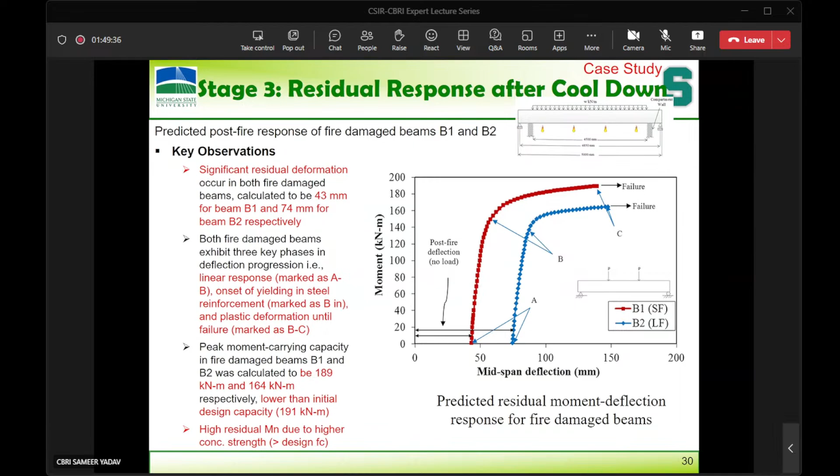So this one collapses, meaning you cannot have class E damage. But there are a number of beams at different levels - this is local collapse of one beam, but the building didn't collapse. So this building has this much residual capacity left.

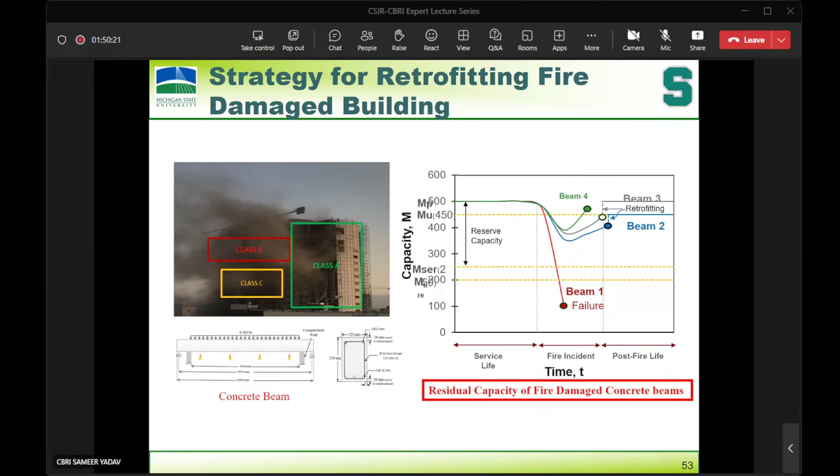If you want to increase capacity, this much retrofitting is needed. So you can develop how much retrofitting is needed to go back to the original capacity.

So what are the repair methods? There are a number of repair methods people commonly use. If it's class A, and in some cases class B damage, just grouting is required, along with painting and surface cleaning - finishing touches, nothing else. In class B, C, D, E damage, you may have to keep structural capacity in mind.

You may have to enhance the capacity to bring back the original capacity of the structure. How do you do this? Either you can use fiber reinforced polymers - this is the latest technique used in a lot of applications, very big in retrofitting. It has been extensively used after the Northridge earthquake and other applications, and it works very well. Now there's also the bolted side-plating method for steel plates, or replacement of concrete reinforcement methods, or externally you can use steel wrapping. So a number of things can be used.

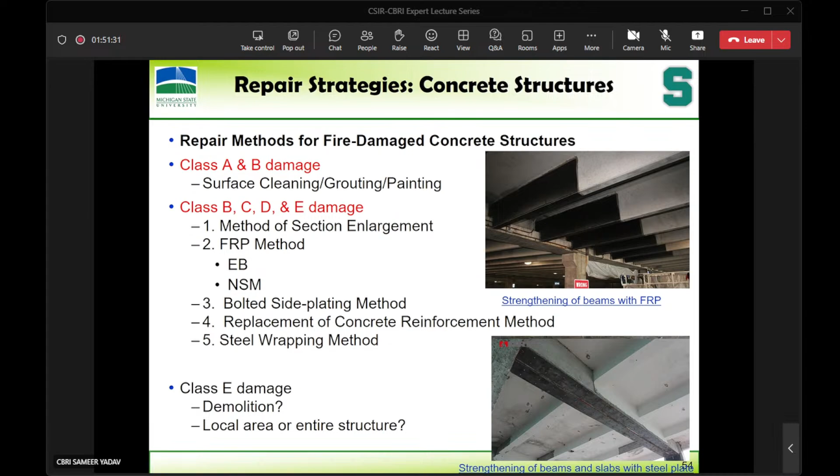Okay, and if it is class E damage, maybe it has to be demolished either locally or the whole structure. So if you see here, these are the repair strategies. So after fire...

Basically, you have to ensure that the structure has the same level of structural safety and fire safety. Many times people forget - they strengthen it to get structural safety, but before, the beam was okay. If there are steel structures especially, you have to make sure you put sufficient insulation just like before, and if you put steel plates on the bottom, that weakens the fire safety. So even for a concrete building, before you may not have needed fireproofing, but once you put the steel plates, you need to make sure it is fireproofed before occupancy. Otherwise, if there is a fire, the steel will disintegrate quickly.

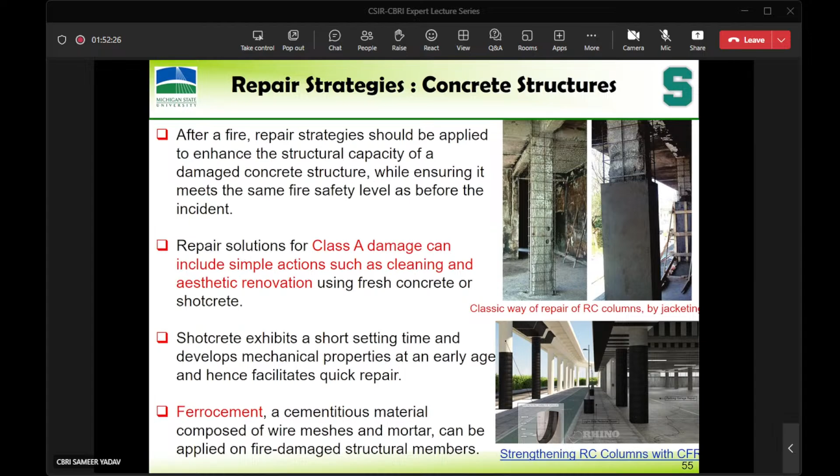So retrofit is a possible way. Some of the applications include strengthening with CFRP, for example, here. So for class B and C, FRP-approved materials are recommended. Additional steel reinforcement, steel ring plates, jacketing of the RC columns is very common. Make sure fire resistance ratings are also satisfied.

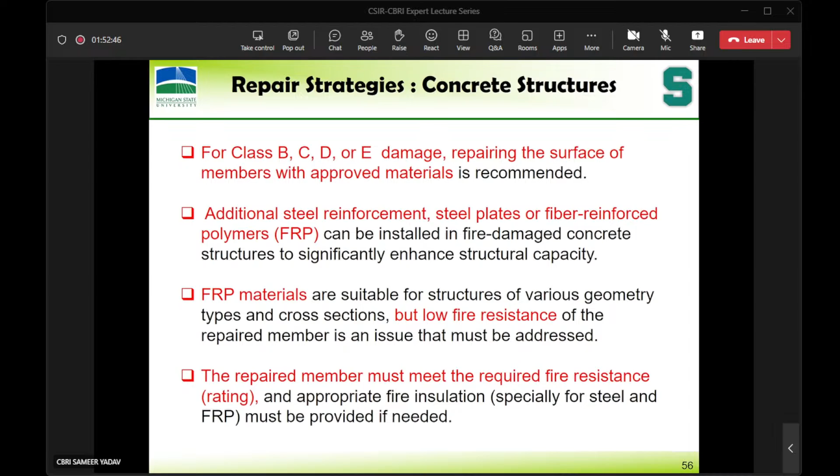So in summary, reinforced concrete structures exhibit good fire resistance because of their low thermal conductivity, high heat capacity, as well as lower degradation of strength properties. So structures following fire exposure can be grouped into classes, class A to class E. Class E buildings might have to be demolished. Class A, not much is needed.

Class B, C and D have to be analyzed using advanced methodology if you want to get the reliable capacity. You can save a lot of money. If there is a building where fire burns in some compartments and firefighting happens, some beams require a 40% increase in capacity, some require less. Fire damage is not uniform - you cannot apply the same approach to everything.

So by setting it up properly, you can save a lot of money by doing engineering. You spend some money on engineering, but you save on the materials. It's sustainable as well, right? So advanced analysis technique is the way to go.

Right now, with the availability of Abaqus and tools like this, you can apply a three-stage analysis, and it can be very nicely modeled and developed. There are a number of critical factors that influence the post-fire residual capacity of members, including fire exposure, load level, and restraint effects. Following a fire incident, fire-damaged concrete members might satisfy the design limit state, but they may not have the original reserves. In fact, they survive the fire because of the original reserve strength.

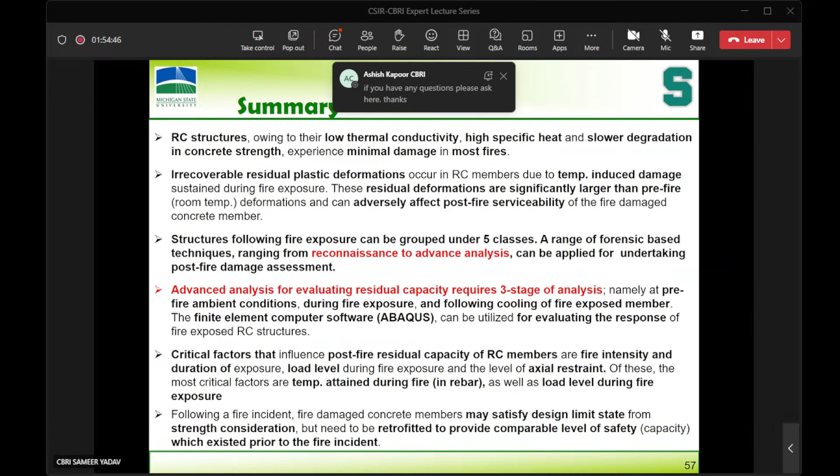We generally provide a significant increase in cross sections, additional capacity, because designs are always conservative - but after fire damage, they won't be that conservative anymore. So if you want to maintain and go back to the conservative design, it has to be retrofitted. That should be kept in mind. So that is possible.